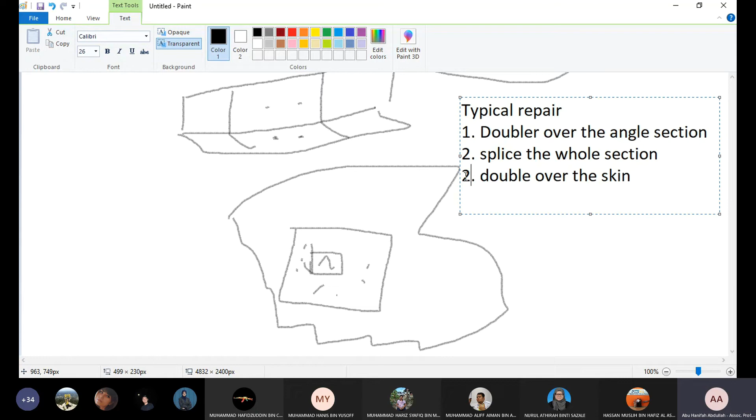Okay. Anyone with question? Okay, let's look at this.

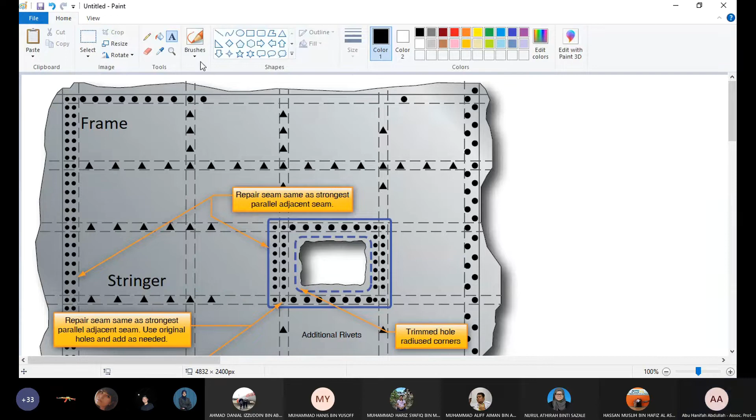So here we have a damaged skin section. Again, we can see here this massive part here is a frame, and the small thinner section here is a stringer. So this is the frame, underneath the skin. And this is the stringer, underneath the skin.

Okay, now we can see there's a defect here. So what we do for the defect, we will cut them off. Remove the section off. Okay, remove the section off. Then we install a filler. Some designs, we install a filler, just another skin to fill up the space. Since this is behind, it will be a dotted line, because it's behind a doubler.

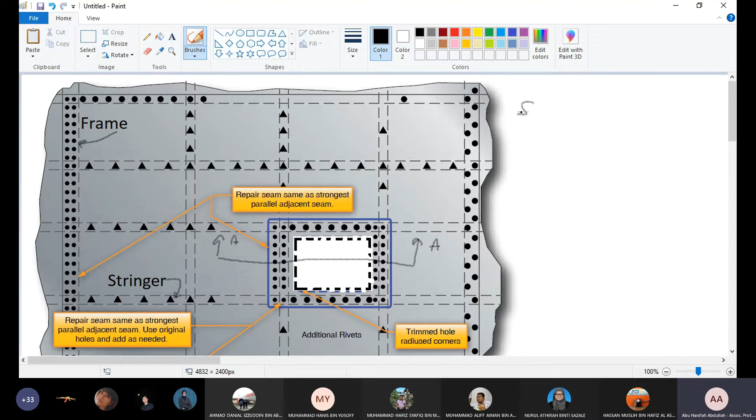So that is one. So for that case, we may see a cross section. If we cut across here, and this is A, this is A, so section A. Section A, what we can see is the skin. We can see a cut.

So we can see a filler, and then we can see a doubler. Then we will also see rivets, one row, two row, one row, two row. And obviously we also need to rivet the filler.

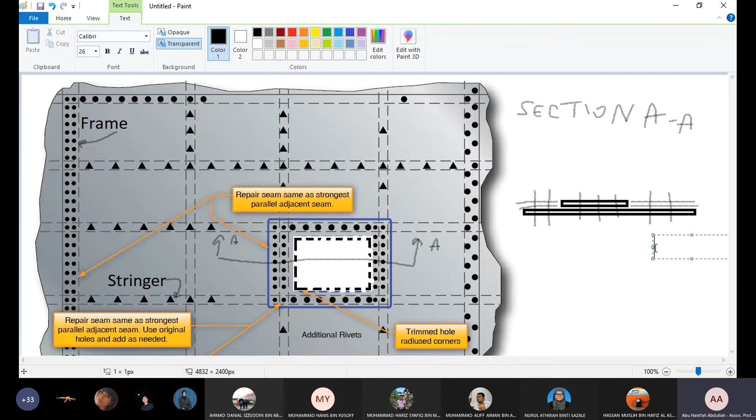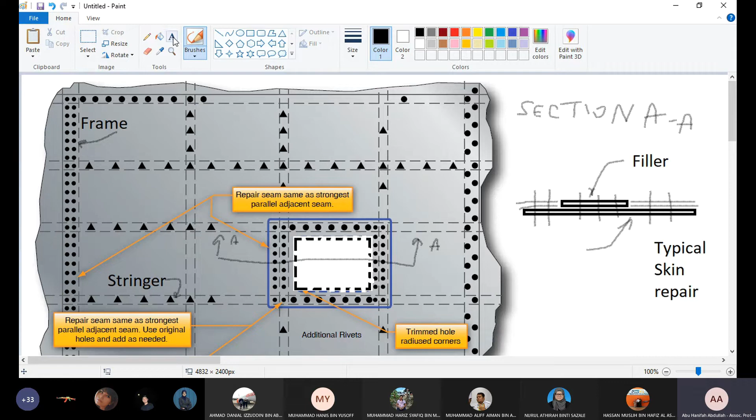So this is a typical repair, where we will have a filler to fill up the skin that you cut off. And we will have a doubler. And obviously we will have rivets. So this is rivets.

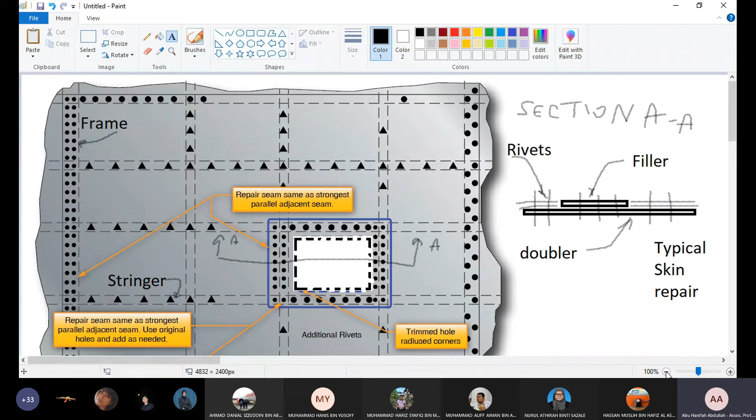Any questions so far? Okay, so no problem.

Okay, so that's what we have. We have a defect, we cut off, we put a filler to fill up the space, and then we install a doubler. Okay, for RVSM critical, for areas critical for aerodynamic smoothness, we put the doubler inside. The filler will be outside. You just reverse. This is an area where you're not concerned about aerodynamic smoothness or RVSM, so we put a typical doubler repair.

However, if the area is critical for RVSM or aerodynamic smoothness, then you have to put the doubler inside, and the filler will be outside. The only problem is getting access to install the doubler and the fasteners. The fastener is not a big issue. You can use a Hi-Lok or lockbolt, whatever fastener. The main issue here is how to install the doubler from inside. So you have to get access to the inside. You may have to open the floorboard, open a few areas to get access to install the doubler.

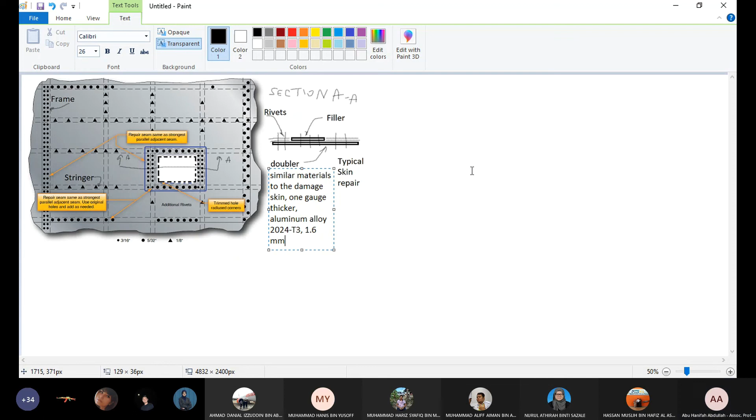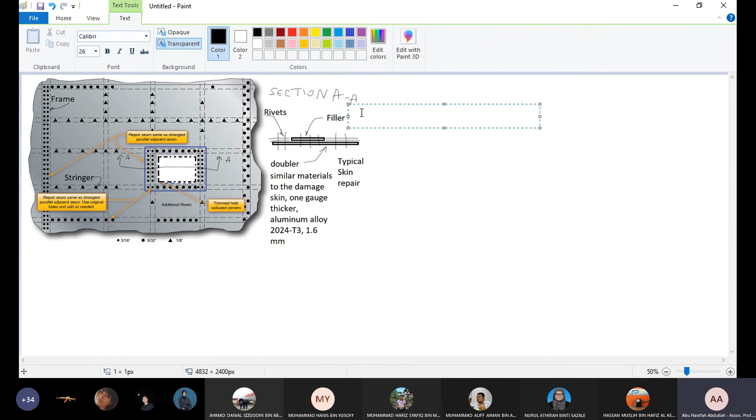Why does it have to be similar? Because we want to prevent dissimilar metal. Dissimilar metal will cause corrosion. For the filler, obviously you need to have similar material and the same thickness. Or else if it's thicker than the original, it'll be sticking out. We do not want that. So we have to have similar thickness. It should stay flush, especially when you do the internal patch where the doubler is inside. The filler must be flush to the original skin to comply with RVSM or aerodynamic smoothness.

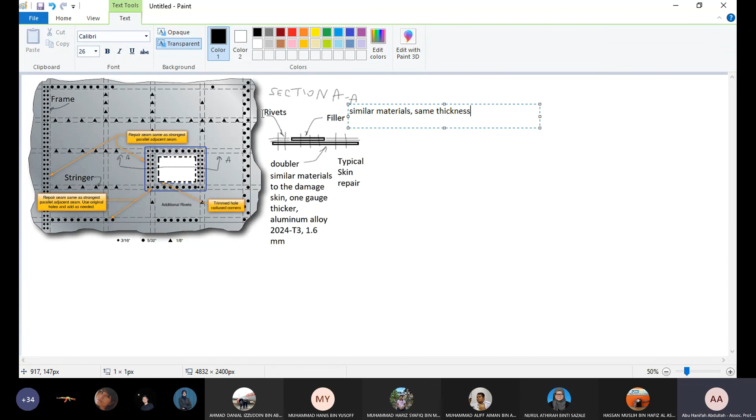And then the rivets. For the rivet, we refer to the table which I showed you last week. You look at the thickness of the material, and then you know what the required rivets are for that thickness from the table. So this is very simple. This is how we do a skin repair. So again, there's no complexity in this. It's very simple. You only need to understand how to do it. The complex thing will be trying to determine the strength, to do the stress check.